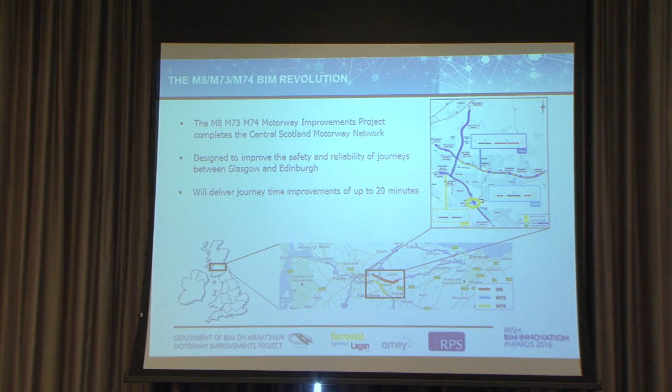The M8 project - a little bit about it. It's a large improvements project which completes the Central Scotland Motorway Network. It's designed to improve safety and reliability between Glasgow and Edinburgh, with journey time improvements of up to 20 minutes along various areas of the scheme. It's a DBFO type contract, a significant investment of over 600 million in Scotland's vital trunk roads - 350 million euro in construction cost, and a 30-year O&M term.

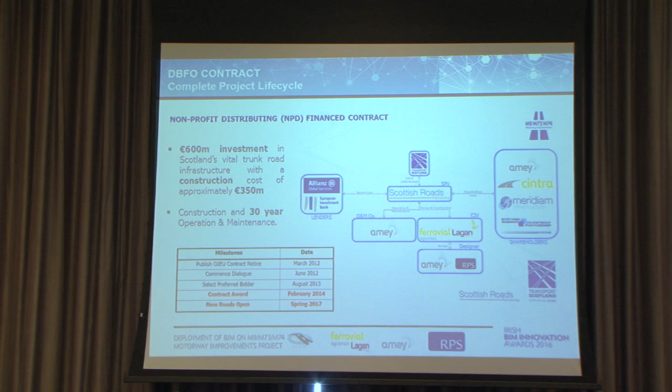The contract was awarded back in February 2014 and is due for completion, all going well, in 2017. The graphic gives you some idea of the people involved and the type of contract that it is.

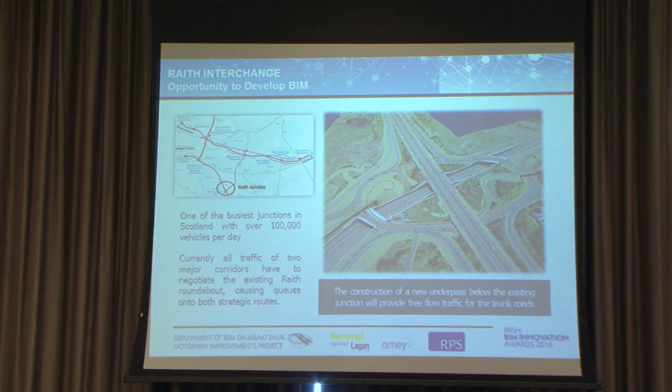In terms of innovative use of BIM, what does that mean? Well, you take a complex junction on a very large project like this, and you find out very quickly that you need to be innovative and you need to learn on the project.

Raith Junction is very complex. It's a 3-level interchange located in a floodplain, which would really require a particular approach in terms of our design. It's also in an area of extreme environmental sensitivity. The high water table level and the existing traffic flows would need to be maintained at all times.

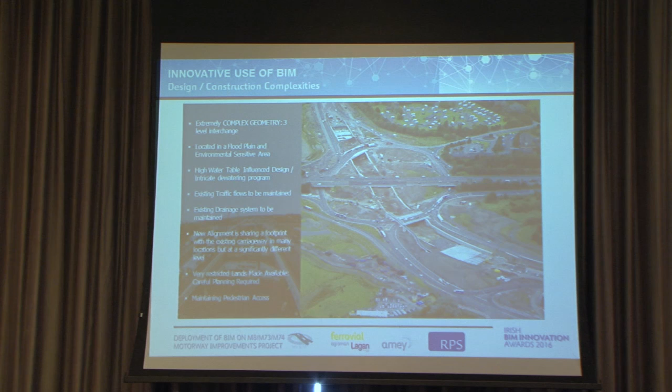The existing drainage would need to be maintained at all levels during the construction process. It's sharing a footprint with the existing roads in many areas, but at significantly different levels, which would provide some problems for us in terms of traffic management and our approach to that. Using our BIM model and the types of processes we put in place, we would work through those. We would also need to provide safe pedestrian access for the duration of the project.

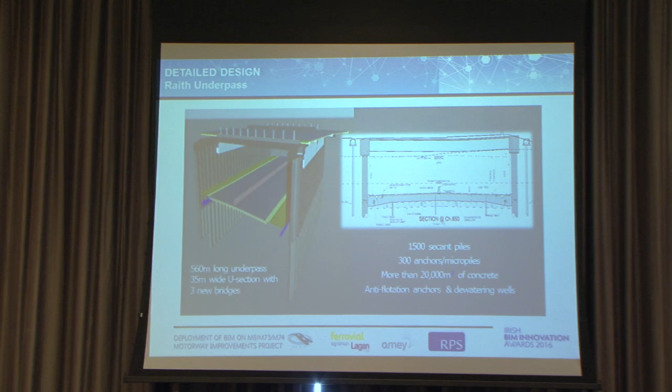Some stats on the junction itself: it's 560 metres in length, 12 metres deep, a 35 metre U-section with 3 new bridges, two pedestrian footbridges, and 5 existing signalised junctions. We talked earlier about quantities and scale - there were 1,500 secant piles used in the construction at Raith, 300 anchors, and more than 20,000 cubic metres of concrete.

It's easy to forget that back in 2014 we didn't yet have a mandate and there was no EIR required at the time. So if we wanted to avail of the opportunity here, how could we overcome this? The parties came together and we put together what we call a joint BIM proposal, effectively to replace the EIR - remembering again that this was 2 years ahead of the mandate.

We would document and deliver our approach through a BEP, which we would put in place in response to this, and we would do it in accordance with the standards that we have become familiar with.

We would also take into account, as best we could, the soft landing's objectives of aligning the interest of those that would design and construct the project with those who would eventually use and have to manage it.

One of the key areas for us was education and training. Coming out of the recession, working from Ireland and having to work on these types of projects in the UK, we looked around at the time and we just didn't see the type of solutions that we needed. We needed people trained at all levels across our organisations, from graduate right through to management, and we needed to decide what type of particular training they would need.

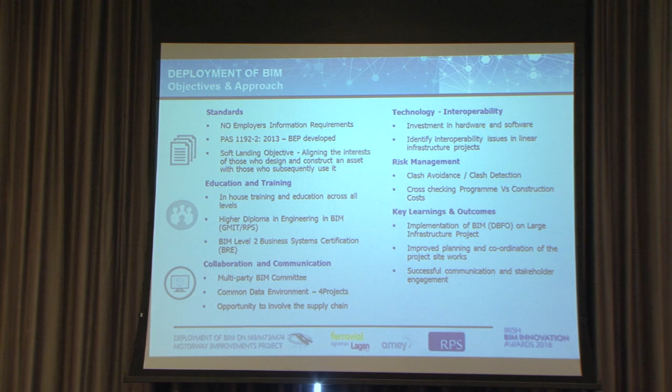We also needed a roadmap and certification. Lots of tenders were starting to ask for BIM, even in advance of the mandate. Happy to say that we achieved certification at the end of 2015, working with the BRE.

The main part to show is how we were working through our objectives, our joint BIM proposal, through our execution plan. We had a kick-off meeting between all the different parties. We had weekly meetings in various locations across our offices here and in Scotland.

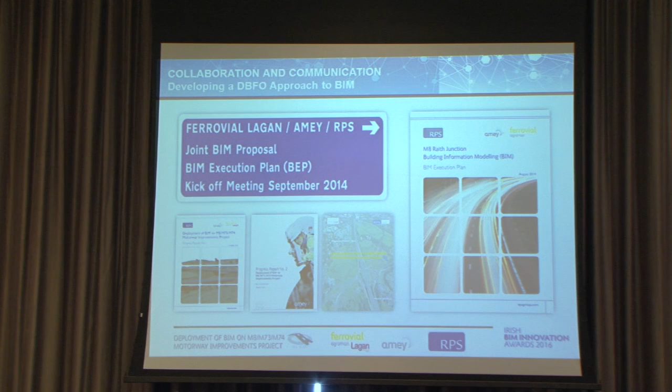As we went through the project, we documented our lessons learned, warts and all, and that was something that was quite challenging, but maybe refreshing now that we look back on it.

Again, in terms of interoperability, we chose to use the infrastructure design suite at the time. Civil 3D for alignment, structure, utilities, drainage, those types of things. Revit and Tekla for the culverts and structures. And we federated these models through Navis.

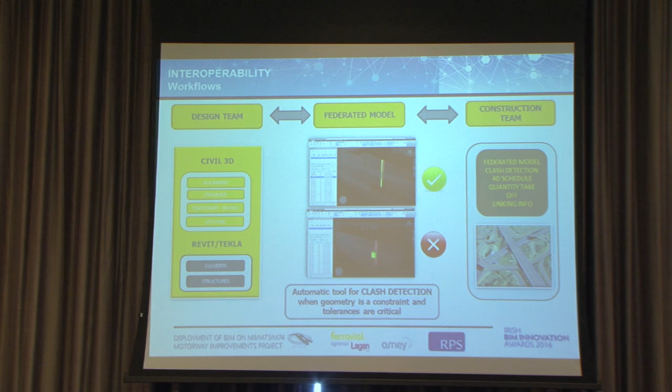The design team and construction team worked together, and there were loads of arguments and all sorts of things in terms of whether we had clashes and whose fault it was, that type of thing. Elena will now hopefully take you through our transition from the design into the construction, and I'll quickly finish up with some lessons learned.

Thank you, Mark. As you mentioned earlier on, this is a design and build project. The construction started about two and a half years ago, and it's still ongoing. It's very obvious that the design outputs are really important for us.

The way our engineers would traditionally work is they extract all the required information from schedules or 2D drawings. The communication we have with the designer is normally via conference calls or sketches that we would send by email. In terms of the setting out, once again, our surveyors are having to extract all the information directly from the drawings and the schedules.

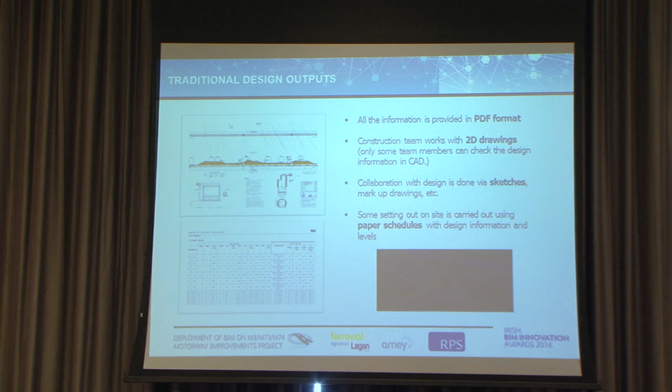The very first benefit that we obtain by using the BIM technology is that we're able to extract all that information directly from the model.

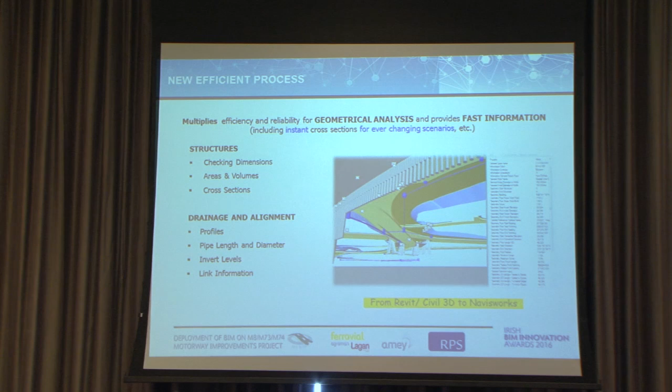Let's imagine that next week we have to install a new run of drainage. We obviously have to order the materials in advance, so we need to know how many linear meters of pipes we're going to install, what's the diameter, what levels are we going to be working at, do we need trench support or not. By clicking on the pipe itself in the model, all these details are provided just within seconds.

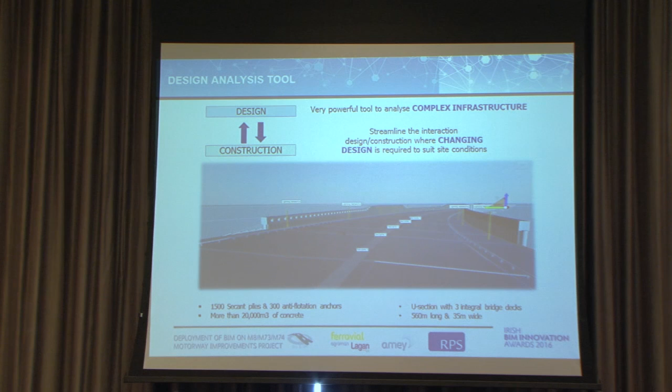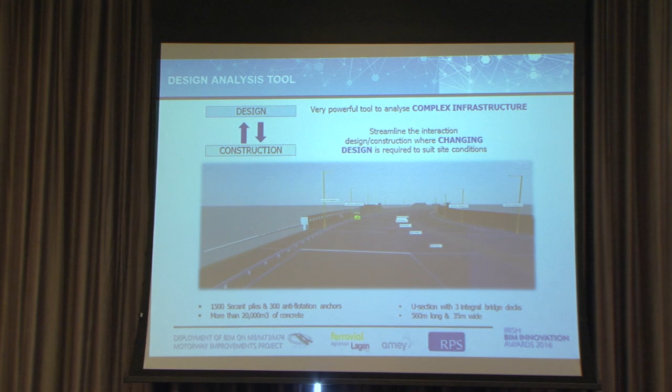Once we get the design, the first thing that we do is we check it to ensure that there are no site constraints that might require a change in the design. When that has been the case, we have modeled ourselves what we would need on site to happen, and we would have sent that back for validation to the designers.

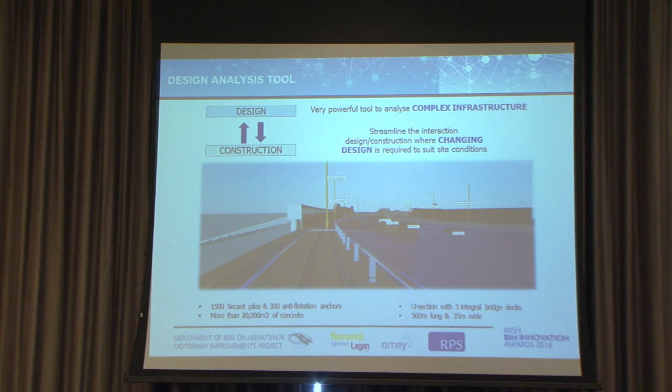Obviously, this has been a very efficient way of communicating. It's very hard to try to explain sometimes on the phone to a designer that is based somewhere else, with a different accent also, that you need to raise several areas of the alignment in a certain way to make it work on site.

So once you know what you're building, we need to start thinking about how we're going to do it. The software in this case has allowed us to move from a traditional way of doing things with 2D drawings and schedules into a virtual animation in 3D of how the interchange is taking shape.

But obviously not everything comes easy. This is a very powerful tool to ensure that we do not have any clashes during the construction stage, but it also takes time to create these sort of 4D animations. Sometimes, depending on the software that you use, you even have to go back to the original model and do some changes in the way of breaking up different elements so you can select different areas of the alignment.

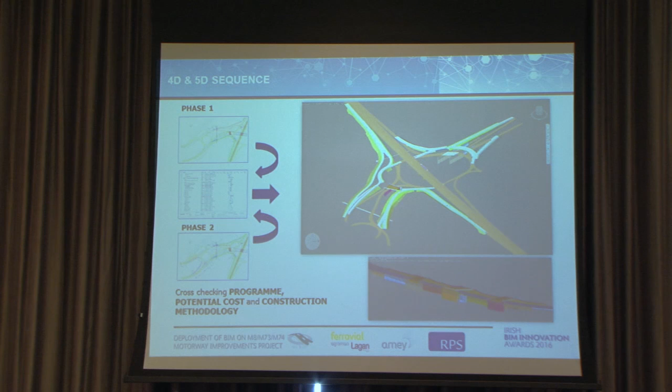Also, if we can imagine the type of scale of projects that we've got, this is very different from a building, since one of the dimensions is very predominant over the other two. So if you can imagine how a 4D sequence of the whole M8, with its 20 kilometers, would look like, you're struggling to really see what's happening everywhere.

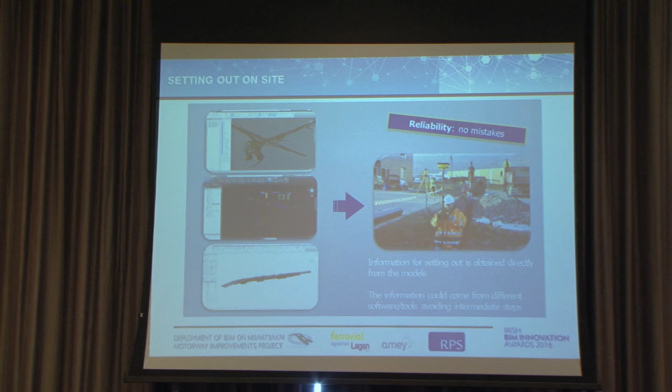So you need to start focusing on the areas that are really of importance to you. The setting out process has also been improved. We're now able to obtain all the coordinates, all the levels directly from the model by clicking on every element. So we're really being more reliable. We're cutting down the mistakes by avoiding intermediate steps.

And what happens at the end of every month? We all have to be paid. And so our engineers are having to remeasure all the cubic meters of concrete poured during the month, all the tons of steel installed. And it's a task that is very time consuming, it's very tedious and mechanical. And the model can really do it for you in no time.

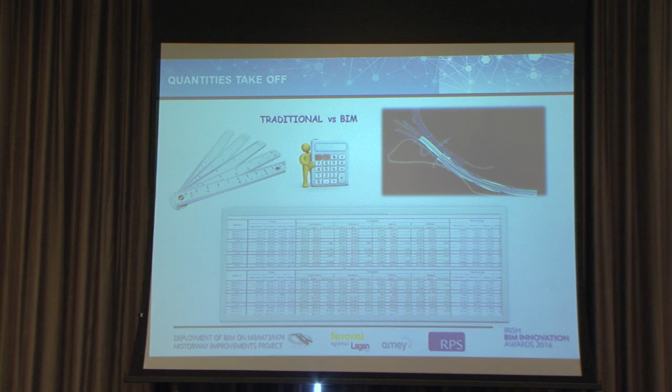And what's even better is that if there's any change in the design during the construction process, all these quantities, all these spreadsheets are automatically updated. And that helps us a lot in keeping the budget under control.

So one of the biggest problems that we've had during the construction is the lack of room on site. So one of the main structures in the interchange had to be built in two halves. This is to allow 4 lanes of traffic to be maintained all the way throughout the construction process. And we've had to work out a lot of cross-sections like the one we've got in the image here.

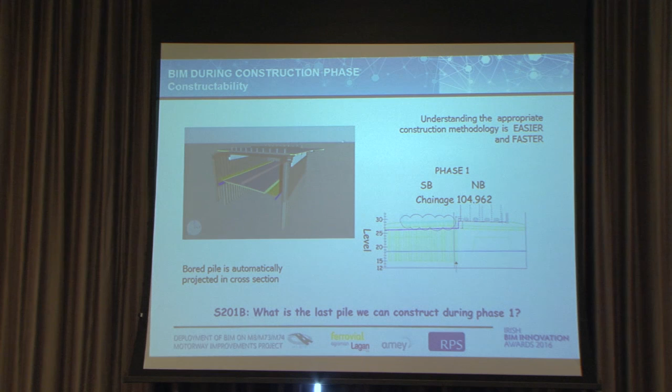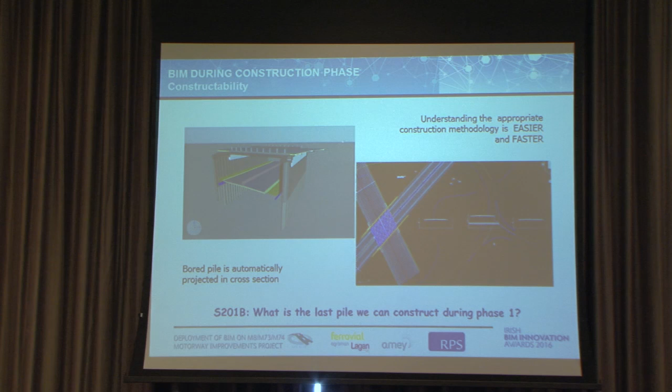Somebody that has done this before will know that this takes time. You're basically checking different drawings in order to produce the elements that you want to show in the cross-section. It's very easy to make mistakes in levels or dimensions or to forget different elements. So when you are able to do these cross-sections with the model, again, it saves a lot of time. And you do not forget items like existing utilities or existing drainage.

This is just a couple of images from the site of this particular bridge being built with the traffic right next to it.

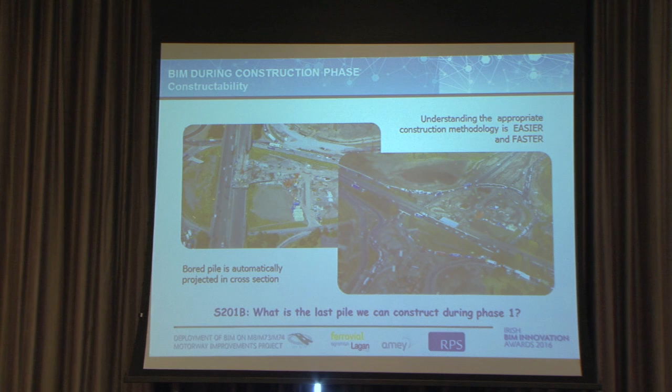One of the biggest challenges in this project, as Mark was mentioning earlier on, has been the traffic management. I have to say first, really to put you into context, that the interchange is overcapacity at this stage, but we still have to be able to build all the new works without causing much disruption. So it's very important for us, and we've had to design different temporary alignments in order to divert the traffic to create enough room for us to build the works.

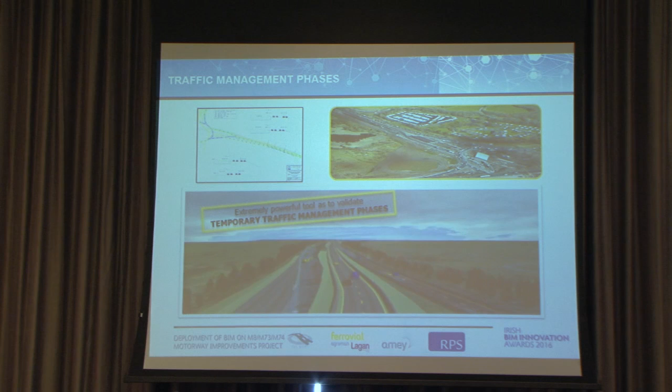But the problem is that before we can run the traffic onto these new temporary alignments or we can close any lane on the road, we have to get the agreement from a series of consultees, such as local authorities, councils, Transport Scotland, Police Scotland, different road maintainers. And sometimes they're not very familiar or they're struggling to understand how the traffic is going to flow by looking only at a PDF drawing like the one we've got at the top.

So we've been able to produce these drawings directly from the model. It's helped them a lot in imagining how the traffic is going to flow. Is it going to be safe? Is there going to be enough room? It's really been very effective in that way.

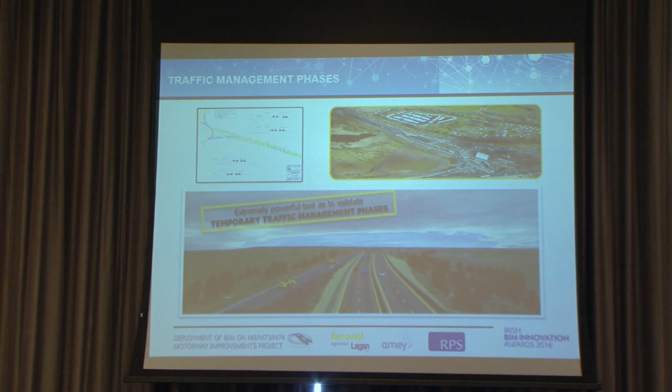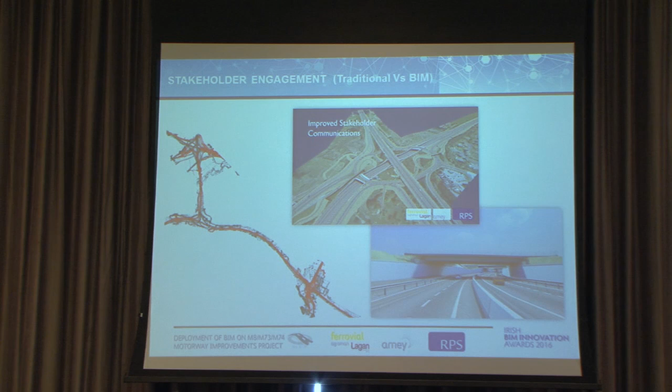The power of the image again: when you're trying to explain to a local resident what you're building in front of their houses, if you use an image like the one on the left-hand side with the new alignment shown in red, they're really going to struggle to understand what you're building. When you start showing them images like the ones on the right-hand side, they see the interchange, they see how it's going to look.

Finally, we mentioned earlier on how the operation and maintenance team had been involved since the very beginning through our BIM committee. Before the design is released, we always send it to the O&M team for a quick review, just to ensure that we're not creating difficulties for the future maintenance of the assets.

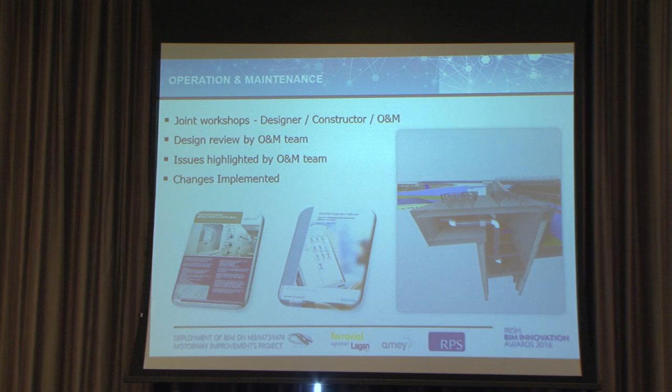And just to give you a quick example, this is a photo of Raith Interchange Pump Station, for which the design had to be altered in order to provide a safer and easier access for the maintenance crews in the future. And now Mark will finish with the key project outcomes.

I guess that gives me 40 seconds. Yes. Okay, so really quickly.

The delivery of BIM in 2014 and without an EIR in place, I would say was an innovation in itself. Client involvement is key in terms of delivery of level 2 BIM. Defining the appropriate level of detail at the outset is very important. It's a very powerful process in terms of complex infrastructure, that is Raith Junction in this instance. It streamlines the interaction between design and construction, and it multiplies the efficiency and reliability at the construction stage.

It's key to successful stakeholder engagement. We've seen large projects here, the Corrib and such, that have been held up for a long period of time. And it has been identified as a Pathfinder project for the definition of the Scottish BIM mandate, which is due to come into place in 2017. And finally, it has been instrumental in allowing us to become design lead on a major project, that is High Speed 2, we've been working on for the last 4 months.